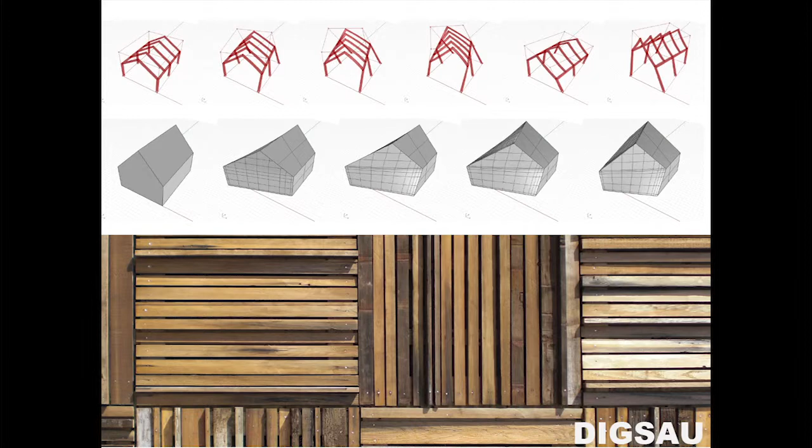But our studio aspires to develop spaces that, through somewhat conventional and traditional means of space, form, material, and light, create spaces that convey potent ideas and connect to the human spirit. Our inspirations come from all directions. Our projects employ selective use of high-tech production, manufacturing, and documentation technologies coupled with more traditional low-tech techniques that basically celebrate the patina of materials, the imperfections of human labor, and the virtues of chance.

We're a projects-based firm. We have a very wide view of what architecture is, how it's made, and who makes it. We're interested in projects that fit into that broad view of architecture, and we allow ourselves to be changed by the diversity of the projects that we take on. Tonight, we're going to introduce the office by presenting our projects as a collection of stories. Like the structure of Ovid's Metamorphoses, which jumps from one transformative tale to another, sometimes on point and sometimes more excursively down seemingly dead-end tangents. We hope that the works that we show tonight demonstrate a focus on elevating the human experience.

Authorships of the stories aren't singular, and many of the stories that we present tonight are not complete. But in 5.5 years, this represents a snapshot of how our office shapes architecture, and conversely how the projects that we do have shaped us as a firm. So Jamie's going to take over now and kind of talk about 3 of our first projects and how they shaped, at least initially, what we're becoming.

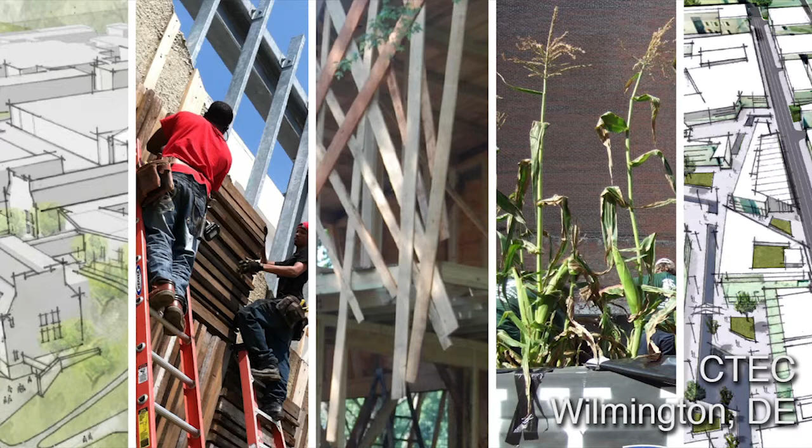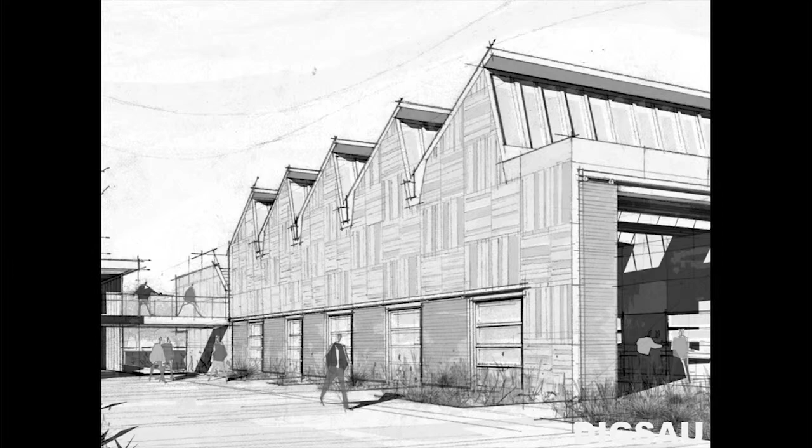And the first is what we call CTEC, the Challenge Program Construction Training and Education Center. And this was a project we did with a not-for-profit in Wilmington, Delaware, that works with at-risk youth, teaching them vocational skills. And it grew out of a wooden boat building school, and has now become a program that teaches all forms of construction skills while working with the kids to earn their GED.

And the site of the project is a site along the edge of the Christina River in Wilmington, Delaware, the former home of both a shipbuilding facility and a train building facility. And now, interestingly enough, the home of a replication of a 17th century Swedish tall ship that initially settled the only Swedish colony in the Americas. So certainly an interesting context for really any project.

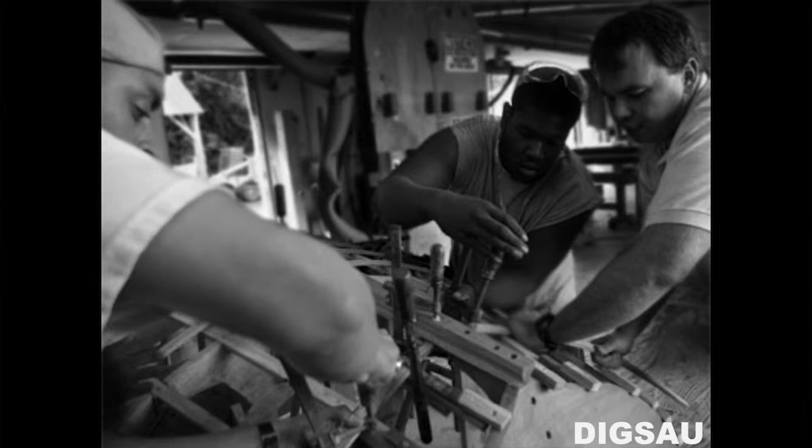What the Challenge Program didn't have was money. And what they did have was really an abundance of sort of marginally skilled trainee labor and salvage materials, and in particular a lot of timbers from warehouses in the Wilmington area that they had deconstructed over the years. And the design that we came up with was really conceived as a component of their educational program. And so the idea was that the trainees would build every component of the building that they could.

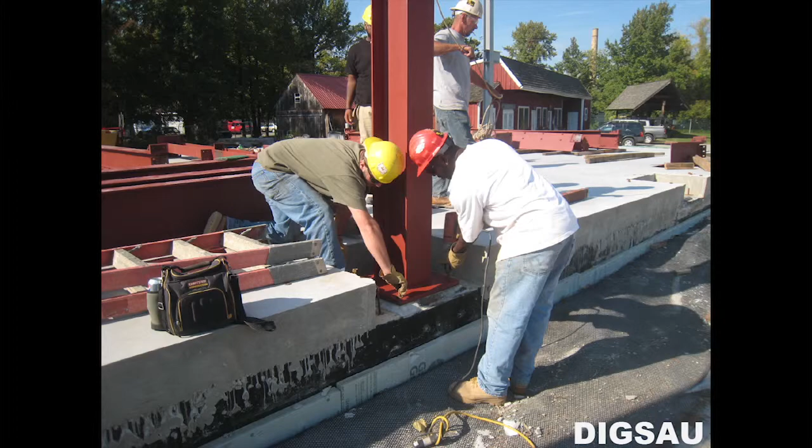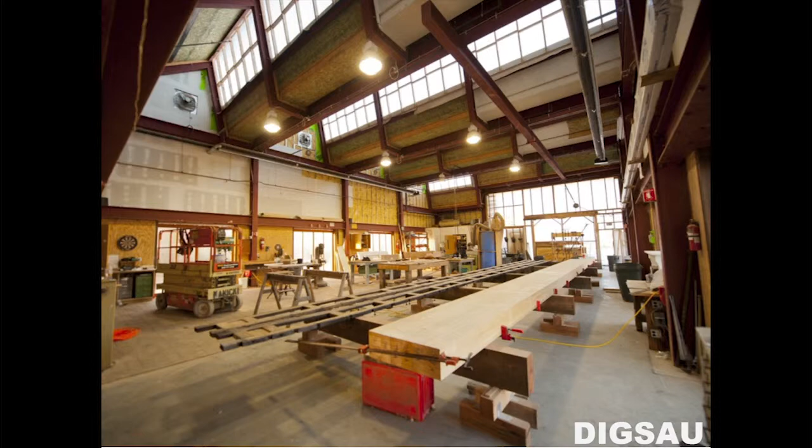And that really started through working with our engineers to design foundations that they could set and rebar that they could set. And the structural system was designed to use all bolted connections so that the trainees could work with the steel fabricators in erecting the structural system. The interiors used as much of the reclaimed material as we could employ, including end-block wood floors that were made from the timbers that they had salvaged. This is an image we like, but it's the shop floor in its slightly unfinished state. It's a little less irregular at this point.

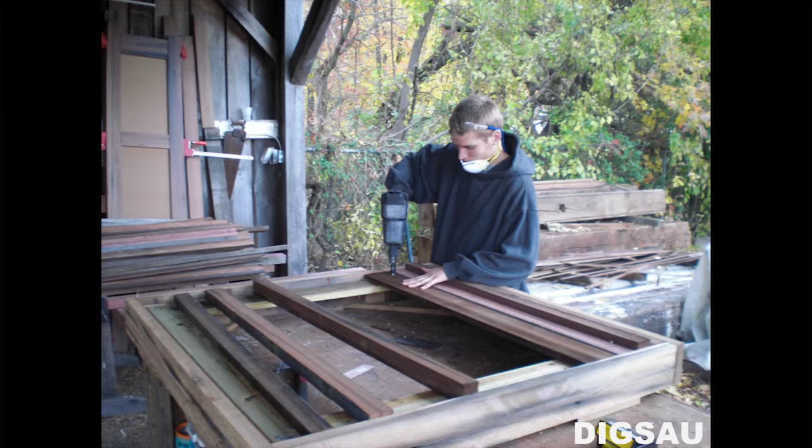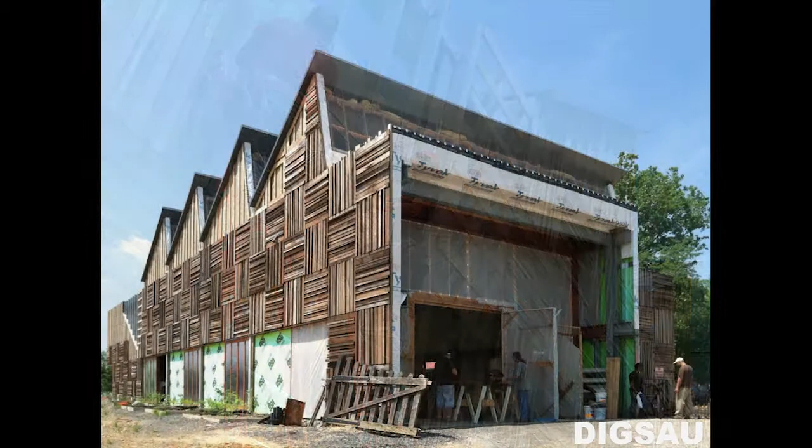And the exterior of the building employed these rain screen panels, a sort of repetitive system of 4x4 rain screen panels that used random widths and species and sizes of lumber that they had available in kind of a quilt-like way, a way that really sort of expressed the hands of each of the individual trainees and really, in a sense, was rich enough texturally to make up for a sort of vast discrepancy in the skill level that the program had as really inherent to its mission.

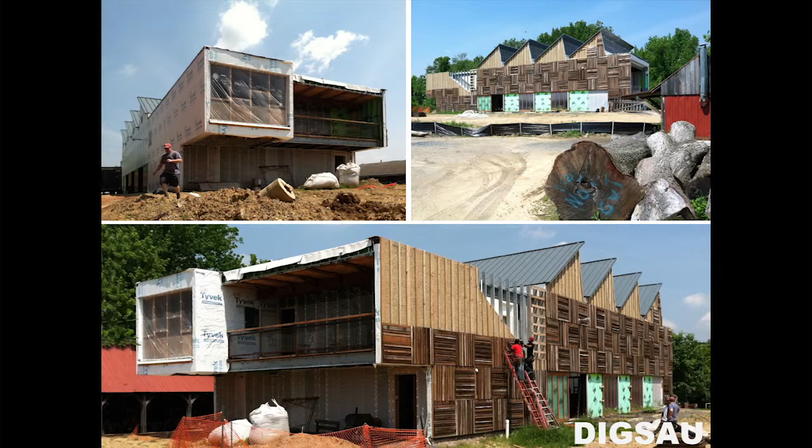And I guess one of the downsides about working on a project which is as much an educational program as it is anything is that the product is often a little less important than the process. And so while a number of projects have come and gone since we started working on this building, it remains an active project in the office and not much beyond what you're seeing here. It's sort of become for us a testament to the durability of Tyvek in many ways.

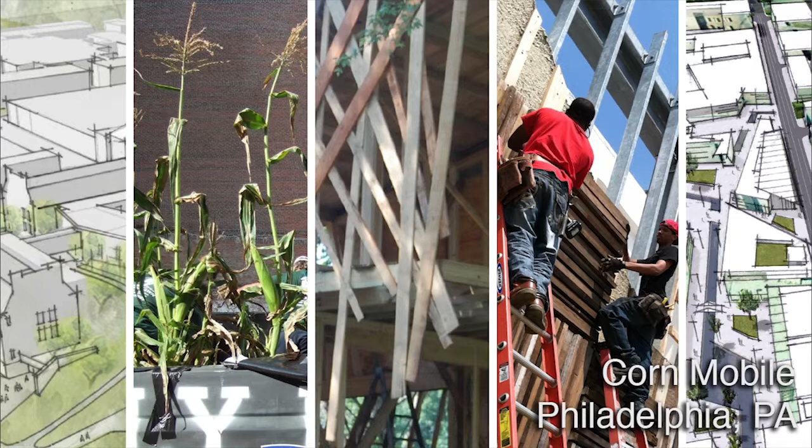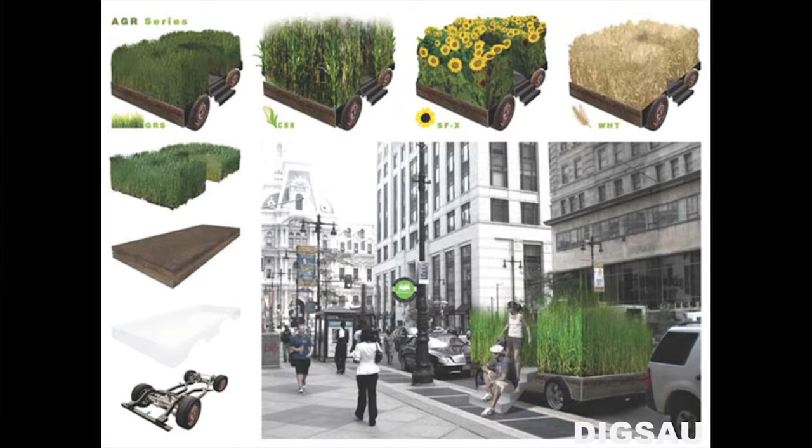Now the next project, also an early project, we called the Cornmobile. And the Cornmobile grew out of a competition we did really early on, which was for a parking space in Philadelphia, kind of like Parking Day, which occurs in many cities. In this case, we imagined a fleet of what we called agromobiles, and we imagined that these sort of mobile planters that were built on the chassis of old cars could be deployed all over the city and use parking lots and parking spaces in a way that elicited some interest in these choices we've made about roads and cars and agriculture.

And we ended up winning, or being one of the winners, and not having really thought it through, we failed to realize that we'd be asked to build an agromobile, and we were given $300 to do that, which is not a lot for building an agromobile. But this is where I think we learned a lesson that served us well, and that is that if you have an idea that is outlandish enough, and if you have enough enthusiasm, you can really get people to participate pretty easily. And so in this case, we got a sculptor, we got a woodworker, we got a really fine graphic arts firm, House Industries, we got a couple farmers, and we got our friends at the Challenge Program to help us build what would become the Cornmobile.

And it started with this 1971 Bronco that we got at the junkyard called the OJ Mobile. And we started working on it. We cut out the engine. We salvaged all the parts to try to get a little extra money for our budget. We cut the roof off. We painted it some more, filled it with earth and about 120 ears of corn, and the Cornmobile was born.

And the Cornmobile spent some time out on the streets of Philadelphia, here in front of Williams-Sonoma, which I'm sure they loved, before finally it did meet its demise, and we did pick most of the corn, and it was salvaged. And I think, again, here, for us, the important lesson was really the improvisational spirit of the project that kind of took it from a rather static concept to something that for us really became quite captivating and joyful.

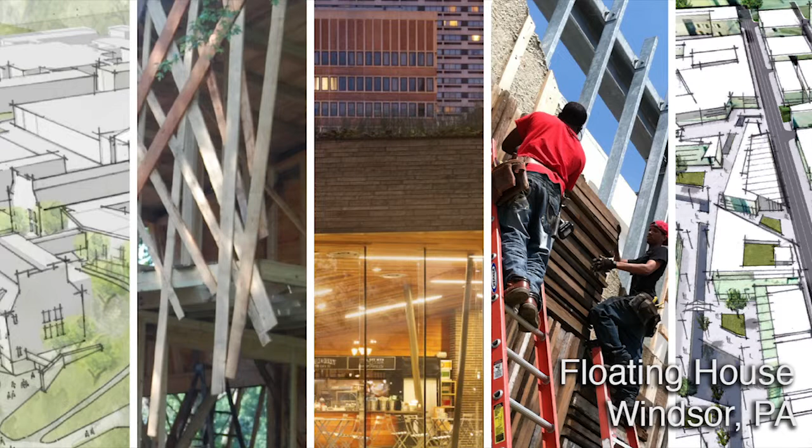And the last project that I'll talk about we call the floating house. So it's Cornmobile, and now it's the floating house. And in this case, the project was for a client who was a friend and a master builder and project manager that we'd worked with for a number of years.

And he had a property along the Susquehanna River in Pennsylvania where he built an earth ship. And for those that don't know, an earth ship is sort of a passively ventilated, passive solar building house made of tires, earth-filled tires sort of embedded into the ground. One of the things about building an earth ship along the banks of a river prone to flooding is that it flooded. It flooded fairly regularly.

And the beauty of our client was that his response to this was to go find a couple salvaged pontoons and a bunch of sort of one-by larch that he'd already salvaged, and asked us to design for him a floating house where he could stay when the earth ship was flooded. So we did some pretty casual research on hydrodynamics, and we started looking at the river's edge, and in particular at the kind of experience of being on the river's edge and looking through a lattice work of branches and of structures along the river's edge.

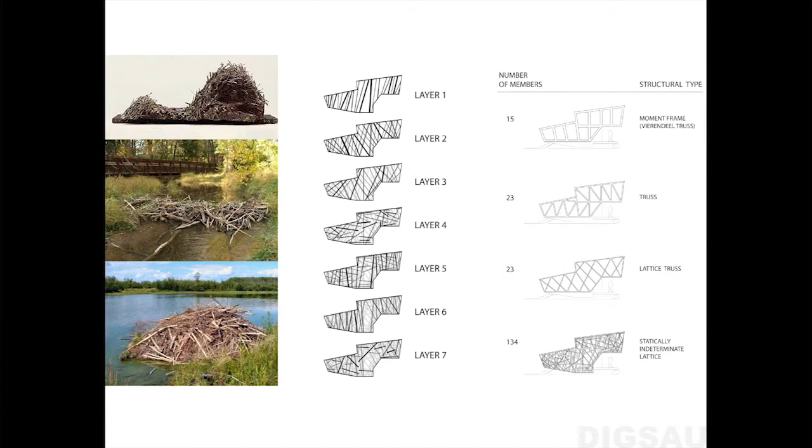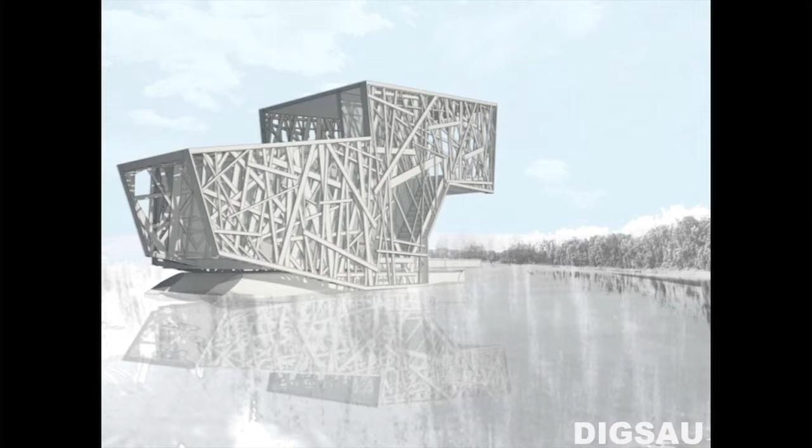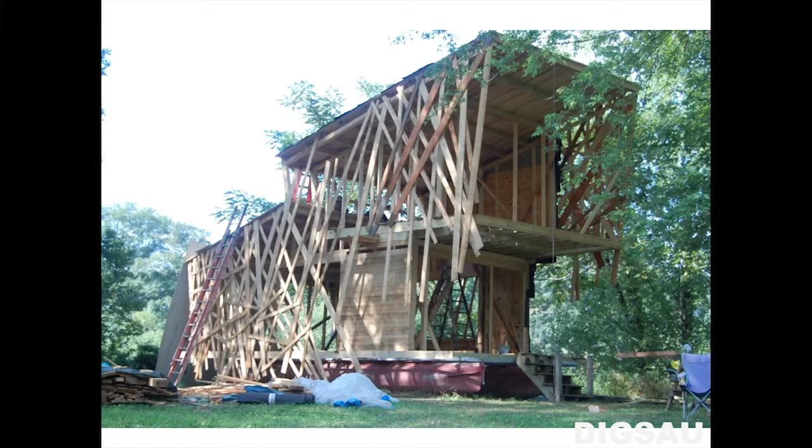So here's an early drawing of the design. Here's some renderings that we prepared to convince our client that it was a good idea, which really, in his case, wasn't hard to do. And then over the course of a weekend, probably a little more, they set out with their larch and constructed the floating house, which really never quite got finished and does remain an evolving project. But we think that's really in kind of true beaver spirit. So this is more or less where things stand. Now, I'll turn it over to Mark for more serious discourse.

So the next 4 projects are a little more conventional, and they all began and finished in the time that the Challenge Program has certainly been ongoing. So we'll look at a total of 4 projects here, 2 in Philadelphia and 2 in Delaware with varying urban conditions. And the first project is a project that we secured in downtown Philadelphia in a fantastic spot in Center City, Logan Square, which is located right in between City Hall and the Art Museum, and really a threshold type of space at the beginning of Fairmount Park in Philadelphia, which is one of the largest municipal parklands in the country, and if not the world, at 9,200 acres.

And this particular site also has incredible architectural and artistic features around it, including the Basilica of St. Peter and Paul, which has just been recently restored, and its brownstone exterior really sings at this point, and the monumental Swann Fountain, which is located at the center of the square, and really kind of a key feature in Center City, Philadelphia. So the site, when we arrived there, was quite derelict, despite its location in really a central part of the city, but hadn't really been taken care of or tended to over time,

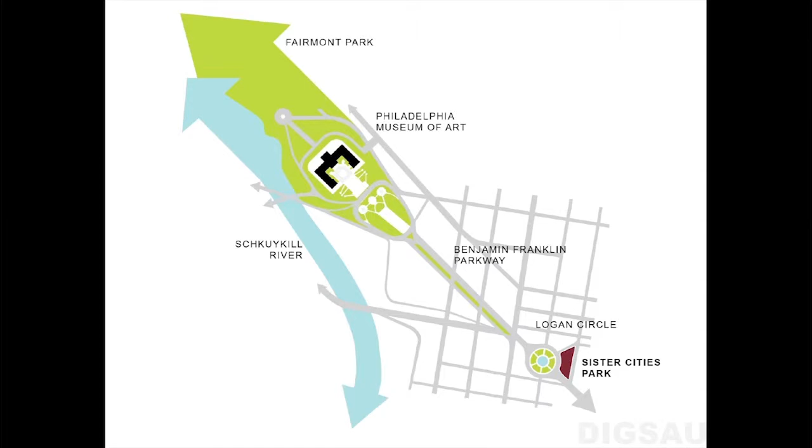and was a spot that after working with the design team, we began to transform in our mind from a public square to really the starting point of Fairmount Park, either a seed of Fairmount Park that had kind of landed down in the center of the city, or really the doorstep that allows you to transition out of the urban context and into the more natural settings of the park. And a part of that research we did looked at the park structures throughout Fairmount Park, and some of the natural structures and shelters in that space as well. And we used those as a point of inspiration and a place to draw from and abstract.

The project itself was really an intense collaboration with a very talented landscape firm in Philadelphia, Studio Bryan Hanes, who happens to be here tonight. And we really see this project as one of creative collaboration. So there's kind of shared ownership throughout.

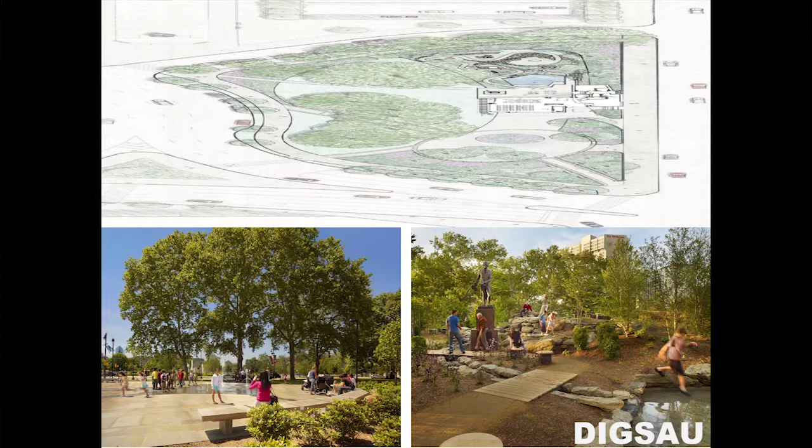But the project itself is situated on the east side of Logan Square, with the Basilica down in front. On the left there is the Sister Cities Fountain, which is dedicated to the 10 sister cities of Philadelphia, and you see the picture on the lower left there. And to the far right is a more naturalistic discovery garden for children to experience informal play in a more naturalistic setting. And in the middle of those two elements is the Park Pavilion.

And this is a visitor center and a cafe which, through the work of the Center City District and Bryan and the design team, began to look at this park as not just open parkland, which is sometimes very active and activated in the city, but a programmed space that has the Sister Cities Fountain, the Discovery Garden portion of it, and the cafe visitor center, which draws folks in.

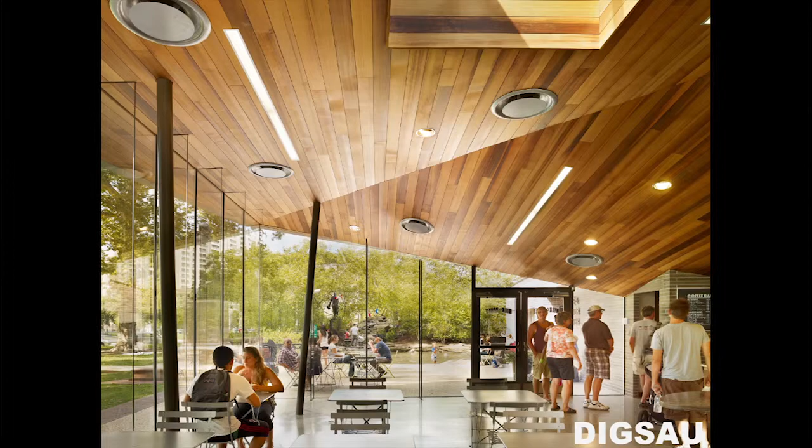The verticality of the city is part of the design thinking of the project. It was really a condensation of the entire Fairmount Park experience down into this small parkland, where you move from the verticality of the city through the space and in this short threshold of a building, taper down to a smaller scale, childlike, if you will, but one that is more scaled and protected.

The materials of the building, as a public project, were certainly a place that we had a lot of focus and really spent a lot of time looking at what the stone materials are, how the jointing would work, patternings, etc.

And I think for us as a firm, in the midst of working on the Cornmobile and the floating house, this was a project that presented itself as a real rare opportunity to have a project in the public realm in the city that we all live in and have children and inhabit on a daily basis. And so I think we took hold of this and invested ourselves, and the entire design team pushed it through with that in mind.

Currently, you drive onto the campus setting there, and you'll find a ghost shipyard with really incredible scale, buildings that are dwarfed by the size and scale of some of these ships. It also happens to be near the airport, so it has a regular passage of flight patterns over the site.

And the developer worked out a master plan with Robert Stern that took on some typical trappings of a campus master plan with a large boulevard that became the organizing feature. But when we entered onto the scene, the context really wasn't there. So where the client wanted an urban response, there wasn't an urban context really to work within.

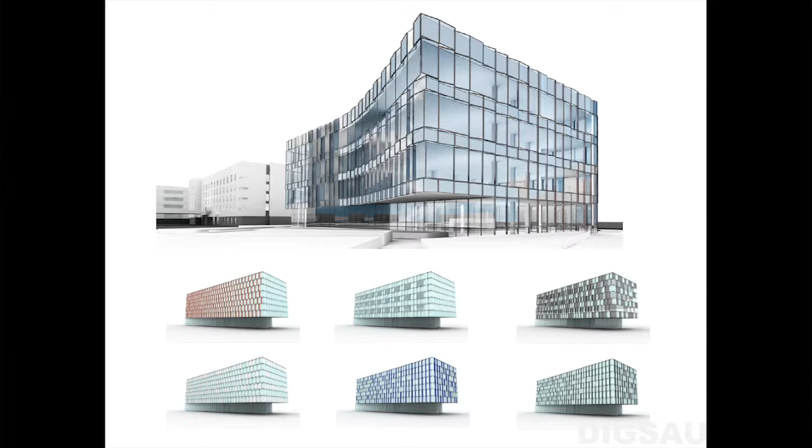Additionally, the project was a speculative office building. So this is back in 2010, and an adventurous client certainly to be thinking about a spec office building at that point. What it meant is that the client and the use of the building was really up in the air. So we were designing an open shell for future use, and the client liked to use terms like glowing lantern and a jewel box. So it became a study in glass and curtain wall, which quickly we determined was outside of the budget of the project.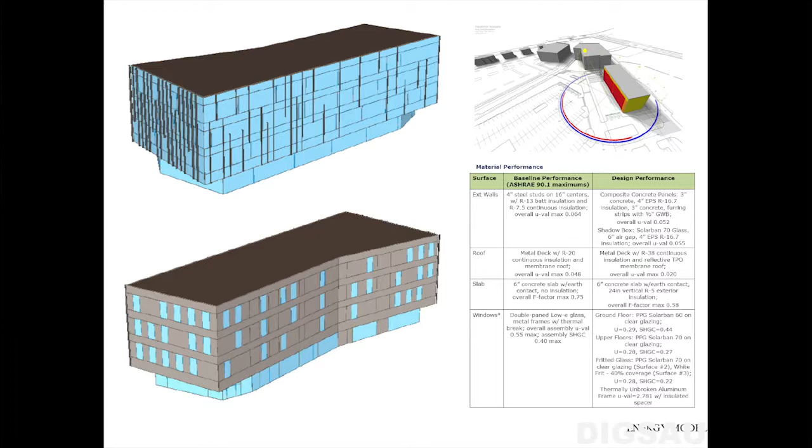So as the project unfolded, the core of the building migrated to the south side of the building and allowed what was really a more environmentally sound southern face of the building with abstracted window patterns, balanced on the northern side with glass curtain wall that responded to the open office floor plate.

I think one of the things that we really wanted to employ here was an abstraction of those forms, and not mimic the ship forms, but really just pick up on what was a lack of scale or a play of scale in those spaces. The interior of the spaces was balanced with that more textured, colder exterior with a lot of warmth and natural materials.

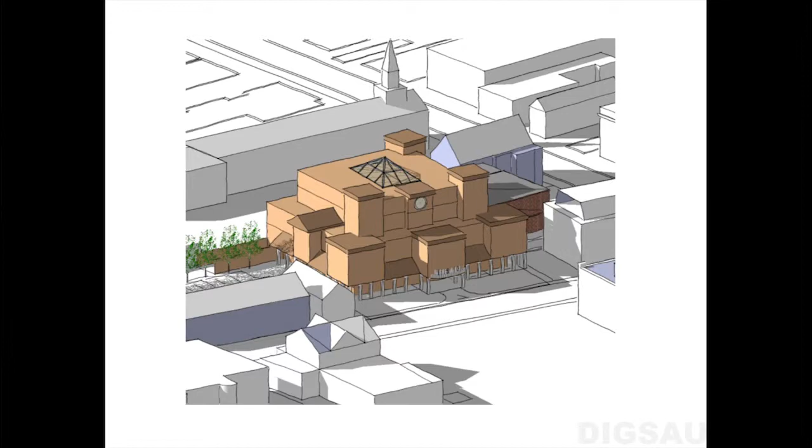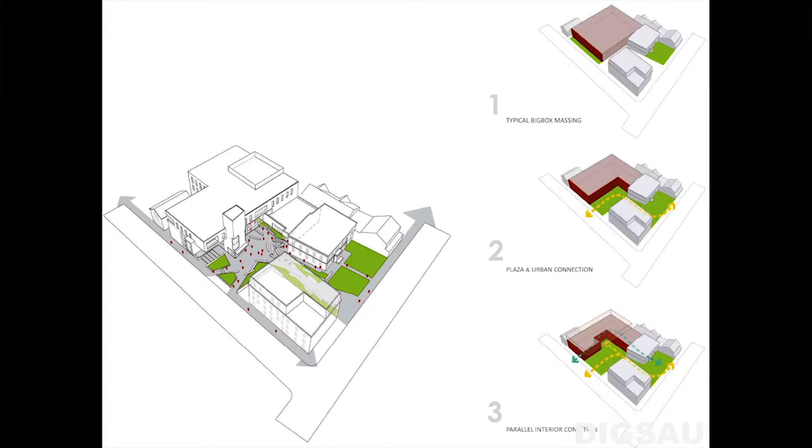And we were helped along in that process with some sketches provided in the RFP of where they thought the project might go. So we kind of absorbed this and realized that it wasn't necessarily a place that we wanted to take the project, and really challenged that framework through the RFP and by developing a site plan that carved away that big box and gave some of that space back to the urban surroundings.

The program included some university office space on the 3rd floor, which we differentiated and created a vertical tower to mark that entry. And the other thing that we really focused on was developing integration between the inside and the outside of the building, which is not typical of the big box kind of pull you out of your car into a space scenario.

Some of the other urban cues here was there were several historic brick buildings in the vicinity that we made an effort to highlight by utilizing a charcoal brick and a darker color of the building, and really allow the red brick of the existing buildings to act as the primary participants against this, what we presented as a textured abstraction of their campus monk bond. And then the inside had a similar type of arrangement with a wood wayfinding system that worked your way through the building.

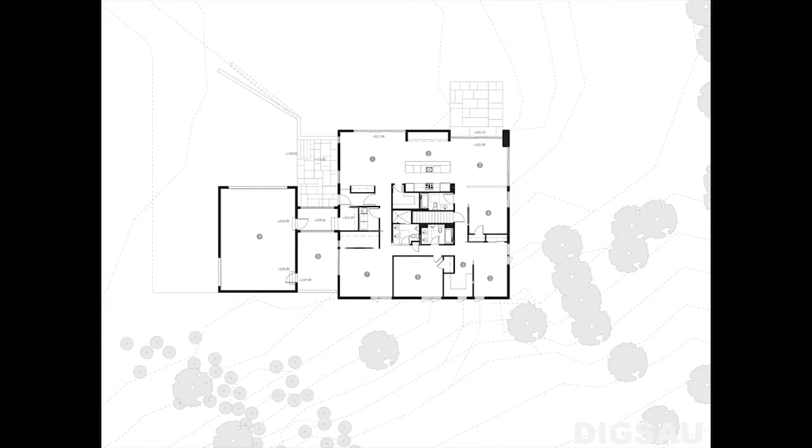The final project here pulls you out of each of those urban conditions into a more rural agricultural location located in southeast Delaware. This is kind of an adventurous client that lived in a suburban tract home and decided, after reading many issues of Dwell, that they wanted to move out of their current living conditions, and imagined kind of a loft-like space ranch house located in this rural area.

The caveat that they threw at us at the beginning was an incredibly low budget. And so right out of the gate, we tried to keep things simple. We found a good partner in a contractor down in Delaware who was really excited about pulling down a barn in the near vicinity and utilizing that siding for the building, which we liked, that texture and that kind of gravitas that it brought to really what is a fairly simple building with simple construction.

I think I'm going to hand it off to Jules here. Jeff's not just standing back there. He's going to get a chance to talk too.

The Chrysler Town is a project for University of Delaware that came our way while we were doing the bookstore project, and it was certainly at a scale that was unique to our firm. The university had recently purchased a 270-acre Chrysler automobile assembly plant that was obviously no longer in use, and they had plans to turn it into basically a technology town, complete with hotels and an Amtrak stop and a fairly self-sufficient, independent new town adjacent to campus.

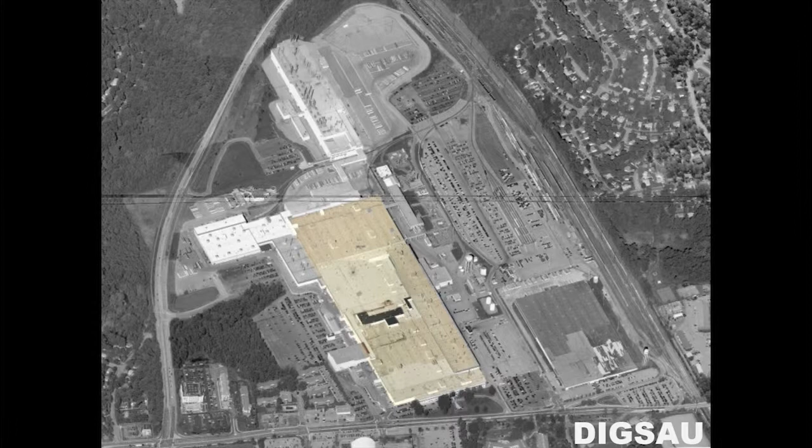In fact, so much steel that the university made more than $10 million from the demolition process alone because the steel was so valuable for recycling. But the liability that they were left with was a giant 30-inch deep slab on grade that would cost millions of dollars to demolish and to abate.

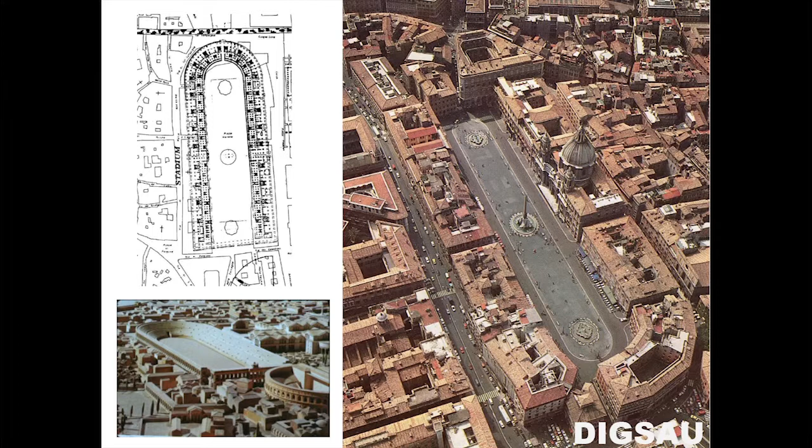And so one of the main ideas of our proposal used the Piazza Navona as a precedent and looks at how that space is shaped by the Stadium of Domitian from Imperial Rome that they just built on top of. And so the memory of Domitian's stadium is still with us in modern-day Piazza Navona. We took that idea and applied it to that 30-inch deep slab on grade and said, what if, instead of tearing it up, we use that not as a slab on grade, but as a massive spread footing that could then be used to accommodate any number of light to medium-sized modular structures.

So the kind of double Portland grid, which you see on the right-hand side, which is one type of urbanism, was flanked to its left with this giant slab on grade that was accommodating for much larger and unexpected structures. For instance, if Boeing needed 5 million square feet and that was how the deal was going to get done, you put them over there. And that big slab on grade could accommodate that kind of space, while a more traditional type of development might

emerge right next door. And so the thought was that, I'm just going to scroll through a couple of these, that the middle zone would really be remaster planned every couple of years, and the northernmost part at the top of the page just kind of followed a very simple and straightforward plan.

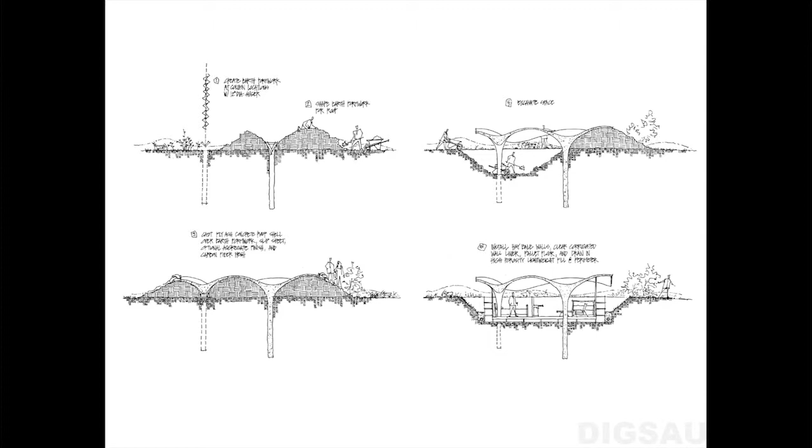So you occupy this lower horizon. So throughout the day, if you're in the house, you're more in touch with the ground, with your horizon being maybe a foot above ground level. And then the thought being that eventually these structures, after their useful life, give way and become hopefully wonderful ruins. Each one a little bit different, shaped by the initial forming of the soil, but adherent to the rules that were laid out.

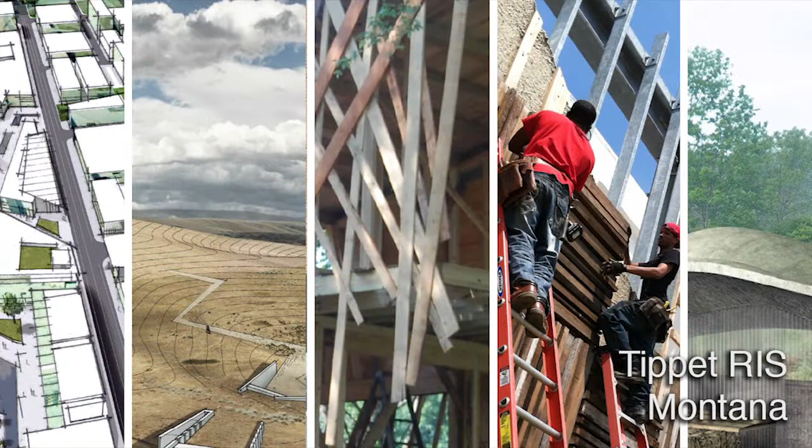The next is a competition that we did last summer, and again at a really monumental scale. This was for a performing arts village in Montana for a philanthropic couple that was very interested in the arts and wanted to build a very substantial performing arts village in Montana. The 4 firms that were invited to compete were Snøhetta, Saucier Perrotte, Bohlin Cywinski Jackson, and much to our surprise, DIGSAU. So we were happy to be in good company with all of the Arup consultants at our disposal.

Arup was running the competition and spent time with this client traveling the world in search of the perfect performing arts facilities. And as you can tell, it was really a spectacular landscape that we were working with, 14,000 acres of it. And kind of overwhelmed by the monumentality of this undertaking, we asked Michael Van Valkenburgh's office if they would team up with us, and they did, and that was a great experience for us.

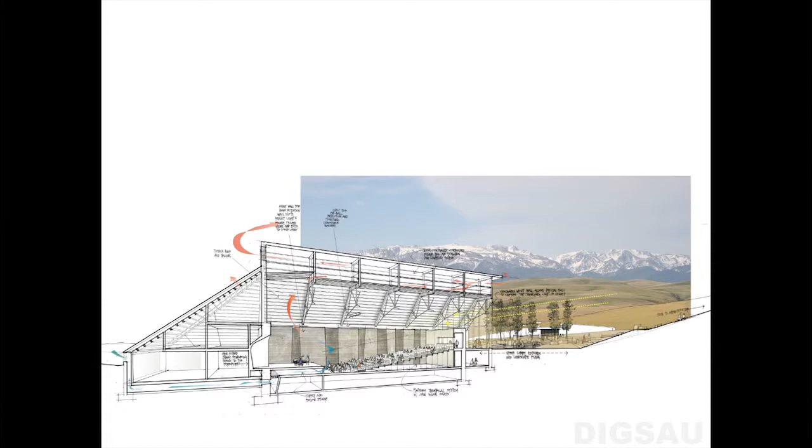The solutions ranged from small-scale performance follies in the landscape to rather sophisticated concert halls, several of which we really got into the inner workings of, all in about a month-and-a-half competition. There was a lot of ground to cover. There was an outdoor amphitheater, really a master plan for how to even begin to think about 14,000 acres of land, and additional programs such as libraries, galleries, extra artist housing, and such.

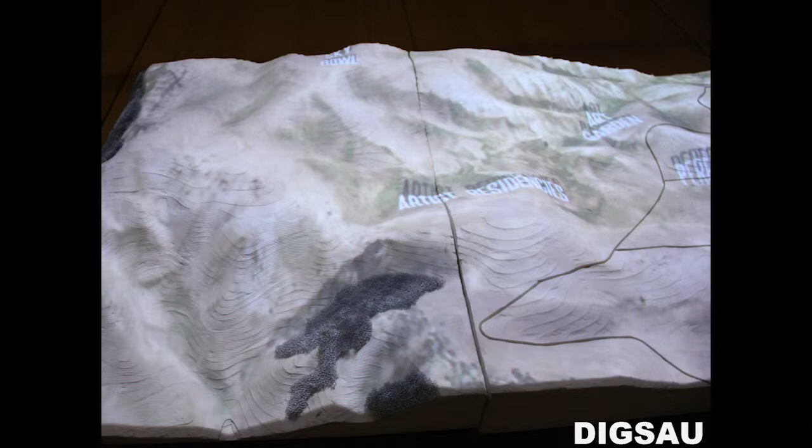In the end, they never picked a winner, so we had hoped that we'd at least be able to brag about losing to Snøhetta in a competition or something like that, but instead there were 4 losers, and so we've wondered what to do with this project, and in the process we made some really great models using a technique that Michael Van Valkenburgh's office uses, and we've, as of late, taken to projecting on these models, and currently there's a show up at Temple University where some of the models are up on the wall with animated projections and stills from the competition, so we got that out of it.

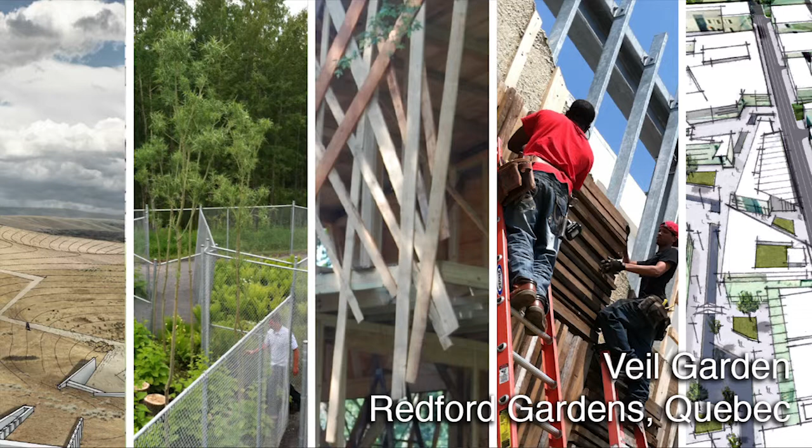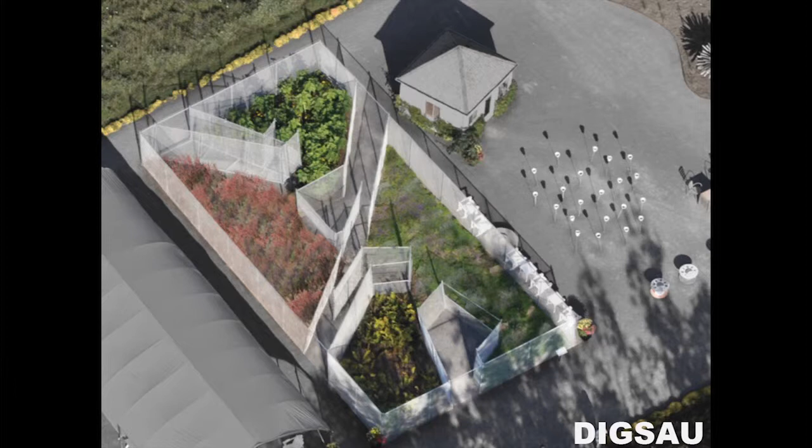And I'm going to speed up a little bit. The Veil Garden is a competition that we did with Studio Bryan Hanes back in 2010, and for those that don't know the International Garden Festival, it's really a spectacular event that showcases contemporary thinking in garden design. The Redford Gardens has a wonderful series of traditional gardens and then this fabulous festival grounds that every year adds a few new wonderful conceptual gardens.

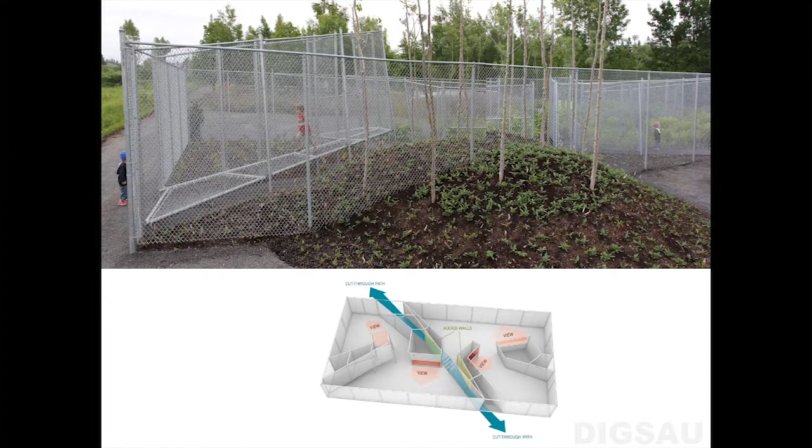Ours is a riff on the traditional paradise garden of ancient Mesopotamia, and it looks at a more decentralized version of that popular landscape precedent. The materiality is chain link fence and landscape material, and it's a very decentralized version of the original typology that never really allows you to see the whole garden at once, but you just see it quadrant by quadrant through these little apertures, and then the rest of the garden is veiled behind layers of chain link.

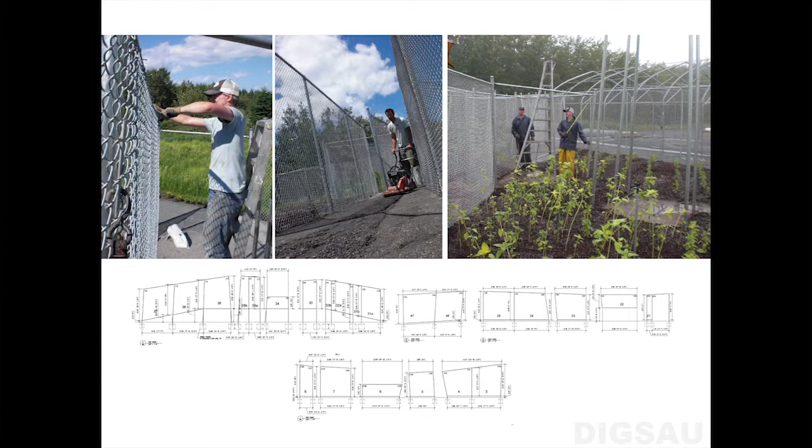And now entering its 4th year in the festival, the garden has evolved, and the human sensations of climbing and chasing and playing have added a new vitality to the project, and nature takes over in very interesting and joyful ways. We're actively involved in its construction each year. We return in the spring to make some modifications and get our fix of hanging chain link, which is really kind of a grueling experience.

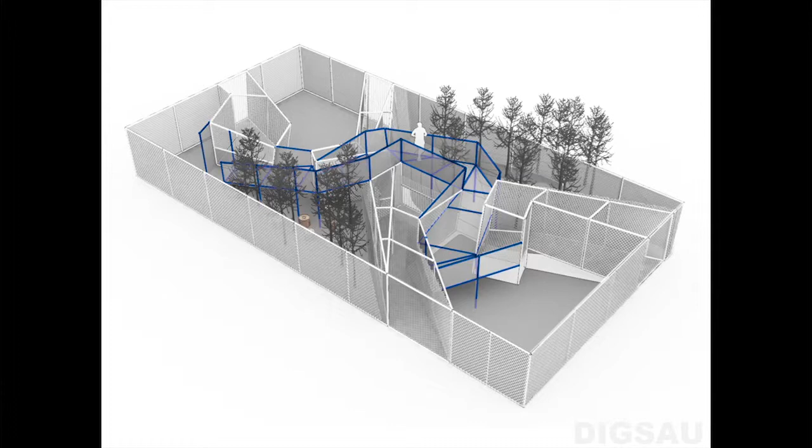But this year we are looking at a new up and over path built out of chain link, which takes us even further away from the initial Paradise Garden concept, and the meaning of this project has really evolved through its use and its modifications. We're also looking at maybe painting it pink or fuchsia, or this week we hope to do some roller paint tests on chain link to see if there's a way to brighten this thing up a bit.

So this is an interesting project in that it came to what may have been its completion in 2010, but has actually, fortunately, become an ongoing work for us. And Jeff is now going to talk about work that's on the boards and give a look into the future of where we're headed.

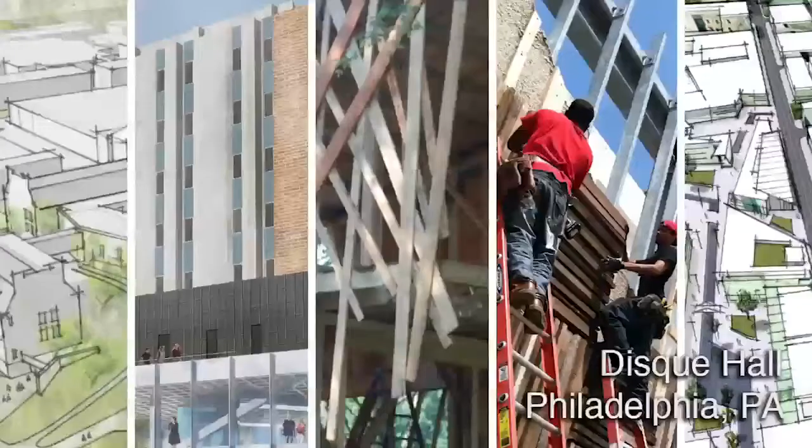All right, according to my clock here, we have 5 minutes, so I'm going to speed. Disque Hall is an interesting project at Drexel University. The interesting thing to us was that the site was that white airspace zone above an auditorium attached to a science tower. This is a view on the bottom, standing on that rooftop, looking out down on a new plaza space that's being conceived. So here's the new plaza space, which is being done by Andropogon.

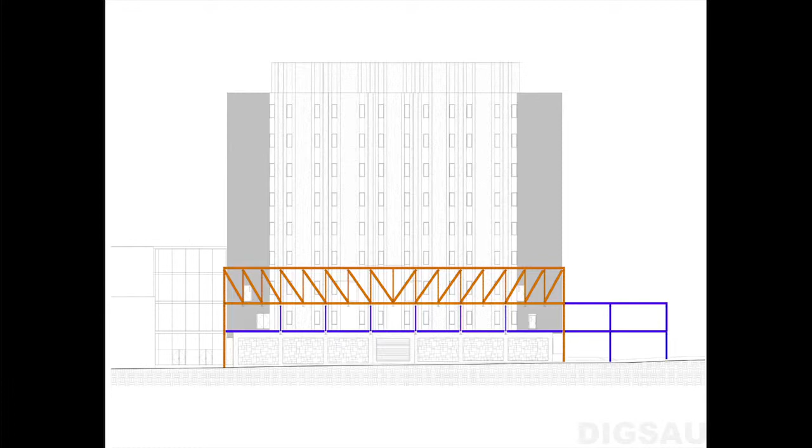The building that we're doing is this addition in the air above the existing auditorium against the tower. It's a tutoring terrace. The interesting thing about the structure is that we're not going to interfere at all with the auditorium. We're putting a truss and then hanging the floor. The truss supports an addition to the chemistry lab on the 3rd floor, and hanging from that truss is the tutoring space, which is the glassy volume, which really helps to form that space on the plaza.

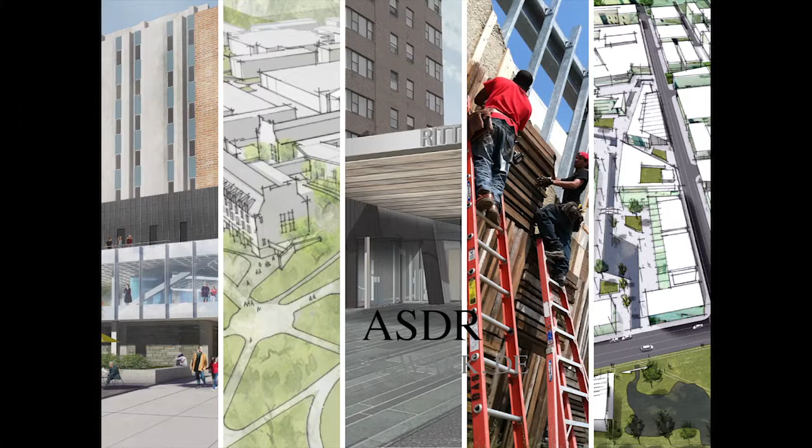All right, Academy Street, a dining and student residential project at the University of Delaware. They keep bringing us back for some reason. Here the problem was they wanted to really bring the student population back to the core of campus along the green. The way to do that was to build a new student residential facility as well as a new dining facility. The problem with that is that the buildings that everyone loves so much that form that green are small, Georgian buildings. So the challenge became, how do we bring a whole lot of building but not make it feel like a whole lot of building?

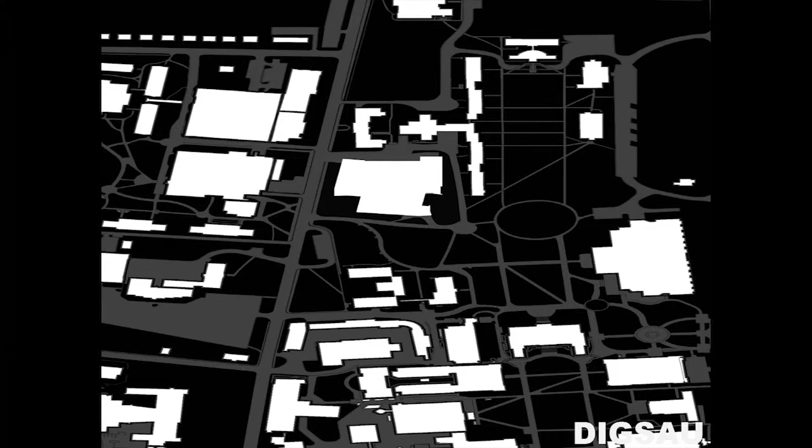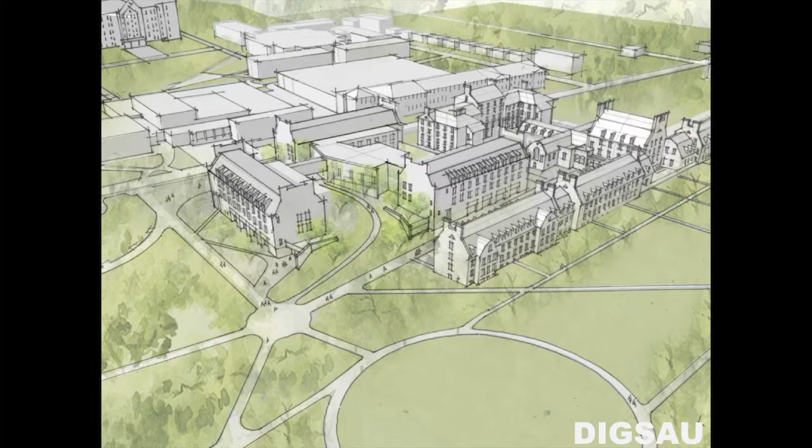It's really a large planted roof that even covers the loading dock, so that the building itself just gets integrated into the campus landscape, becomes a pathway through campus, continuing some of the connections that are being made by the green itself, and allowing us to bring the scale of the buildings down, and also introduce some topography to one of the flattest states in the country.

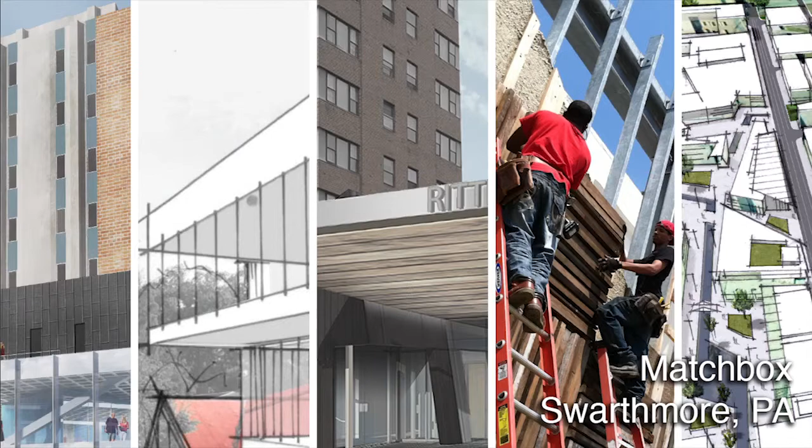The Matchbox is a project at Swarthmore College. It's in the zone of the athletic facilities, which is this amazing roofscape, these red roofscapes of buildings, and we've been asked to put a new building on one of the existing foundations. The new building is a 3-story building.

We were kind of inspired by the forest around it and looking at it as a 3-tiered building: a canopy, which is a more solid meeting space, a fitness space, which occupies the ground plane, and then underneath kind of a weight room, more heavy stuff. And it's really carving the landscape and connecting back to that strange roofscape that makes up the adjacent buildings.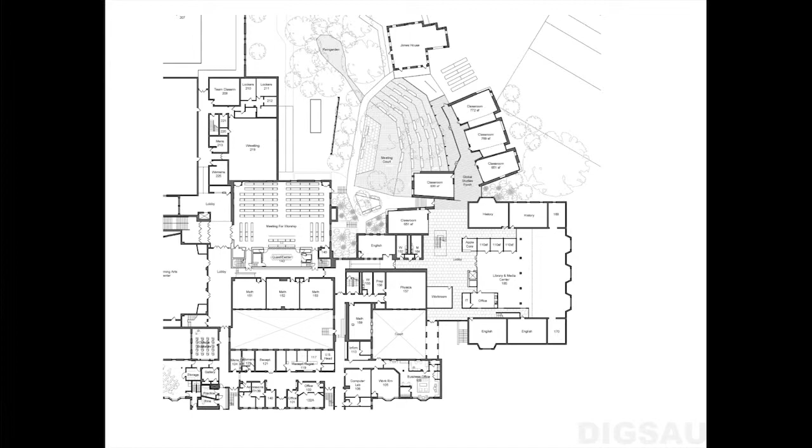They asked us to add 6 classrooms. And rather than add another addition, another building to already a series of 6 buildings that are interconnected, we thought of each classroom as its own little pavilion, making a connection to the historic structure on the campus, which is at the top of this drawing, and connecting this massive building out to the little farmhouse.

We're going to finish with Dogfish Head, whose story has in some ways paralleled ours. They hired us when we had no business getting hired. They didn't really know what architecture was, so their naivete brought us in the door. They asked us to initially just look at their space to do an office interior fit out. We quickly learned that they needed way more space than they had available in the building.

We were also somewhat shocked that Dogfish Head, known for being a beer company that does off-centered ales for off-centered people, was inhabiting this facility, which is completely symmetrical. It was initially a cannery, but had been completely reclad in a stucco and brick kind of extravaganza of symmetry. And the entry, in fact, wasn't even that center entrance. That was a false entry because they used the one in the back.

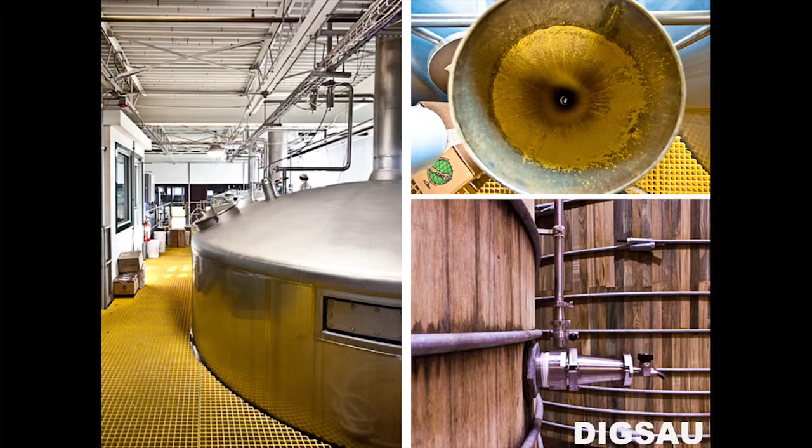We went and toured the facility and got really captivated by the different materials and the process that they go through to make beer. On one hand, their experimental nature, on the other hand, their scientific rigor in replicating the recipe once they've hit it.

The initial program of the building was simply additional office space because they were running out of office space, but we saw the problem as really making a place at this otherwise kind of desolate entry. We wanted to capture what had been a fire access lane and turn it into a place that tapped into the culture of the company and allowed for their big events such as bocce, which is something that people do there while they're waiting for the next tour, and really allowed this place to become a destination.

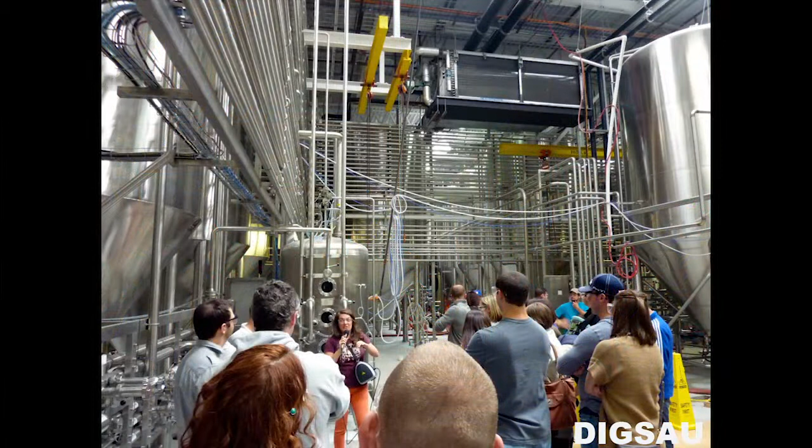The combination of people wanting to go there to see how the beer is made and the success of and demand for their beer led their founder, Sam, to call us in for a more strategic approach to how to develop their place. He also was and still is intrigued by these Disney cartoons about Paul Bunyan, which resonated with him as a Massachusetts kid. He wanted a forest. He wanted this place to be in a forest.

We worked with Julie Bargmann and D.I.R.T., sitting around the table talking about what they wanted, looking at the land they had available, and understanding what facilities they would need to continue to increase their beer production capacity, but also looked at it from the standpoint of bringing visitors to a special place, a destination that people literally have driven across the country to come see.

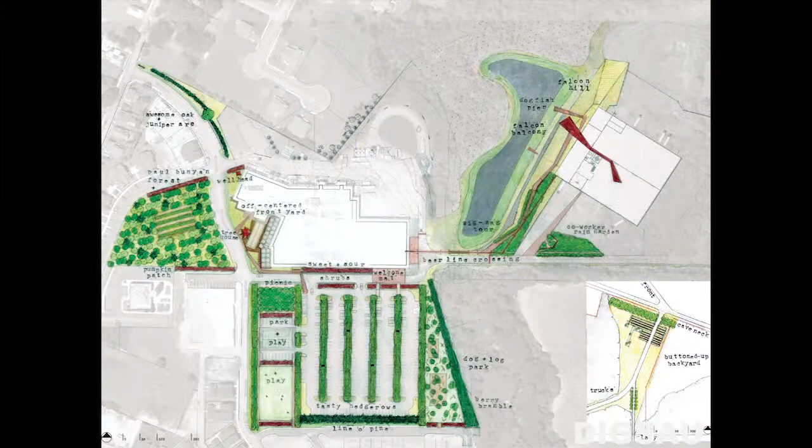The resulting model was turned into a campus master plan, which was a series of additions to the main plant, which included a front end where raw materials are brought in, and then at the back end, a new warehouse to both bottle and store the beer. And we wanted to really understand how visitors could come and experience that process, because it really is captivating.

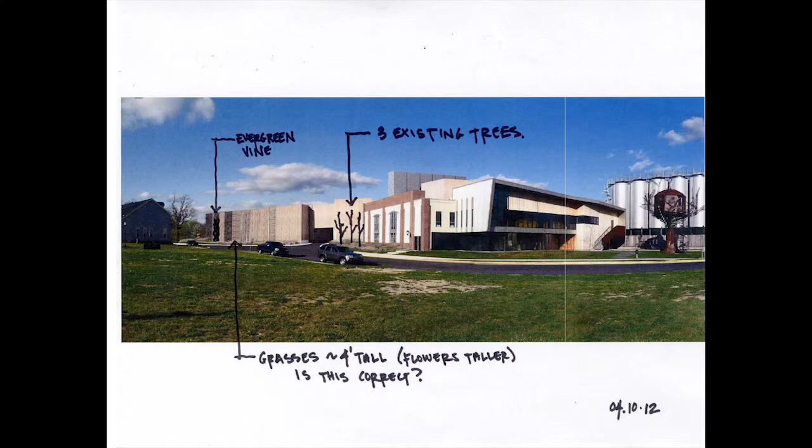So this is the entire facility. The red is the warehouse, which is this really amazing structure that we absolutely had nothing to do with because it's completely defined by setback lines and turning radii of trucks, but it's some of the coolest interior spaces we've ever done. Just the height of the required heights and the strange leftover spaces between them are amazing.

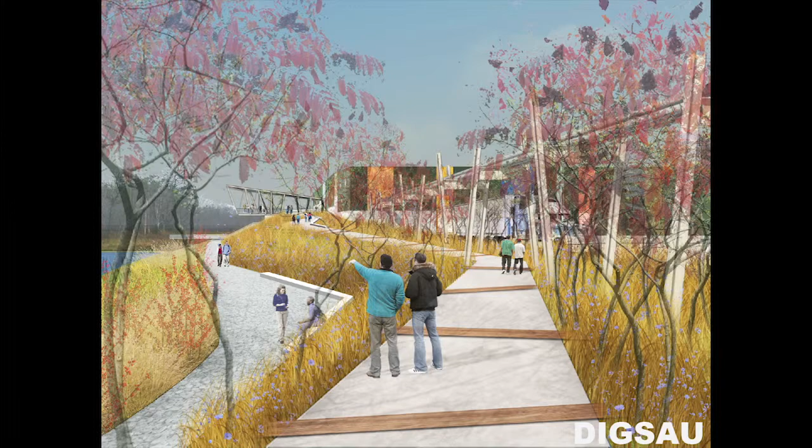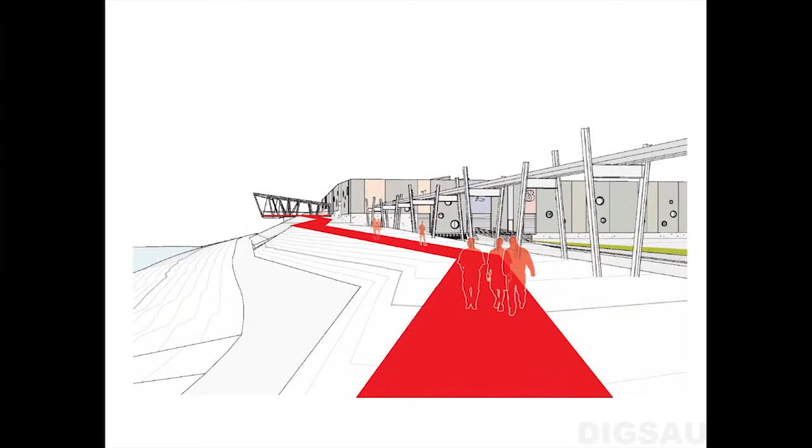The warehouse had a different problem. It's all the way at the other end of the site. We needed to get people there, so we really worked with the team at Dirt to develop a pathway that got you to the building, and then a way into the building itself, which is really a big bottling facility. So visitors can come up, find their way to this beacon, this balcony that comes out of the side of the warehouse, find their way in, and take a look at the production of the beer and where it's warehoused, and the trucks are coming to pick it up.

It's a really kind of fun and exciting place. It's one of the best parts of the tour. Up in safety, out of harm's way, in this suspended balcony. And perhaps the coolest thing is that the beer's made in the one building, but it's bottled in the other, so it has to make its way in a beer line, which parallels the path that visitors would take on their way to complete the tour.

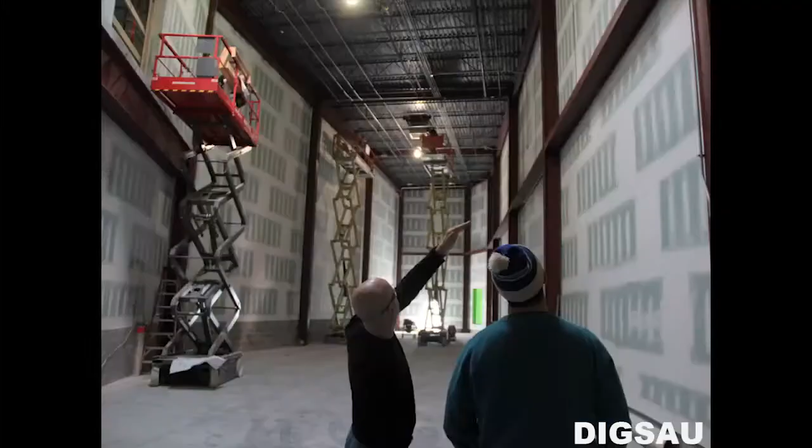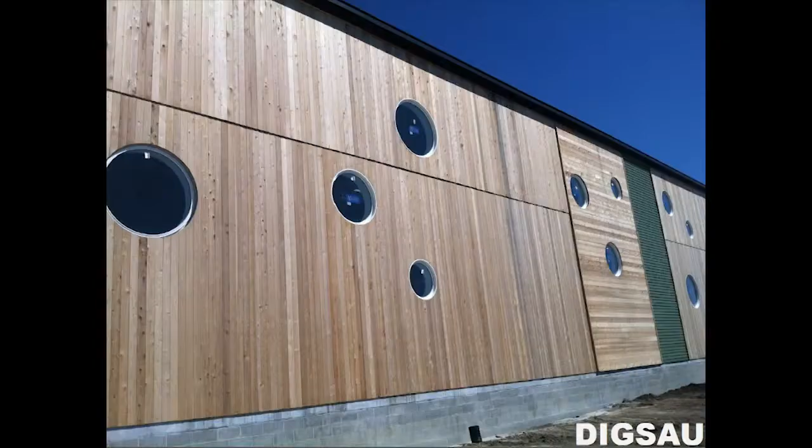This is the new brew house. These are some of these amazing spaces that came out of that. Again, we had really nothing to do with it. It was all driven by clear height requirements and zoning setbacks. This is the warehouse, and the approach to the warehouse. The cladding is a very simple rain screen system that uses cedar, which is similar to, not the actual wood that they use in their aging process, but one that does well outside. And we came up with a rain screen wall system that allowed us to modulate the direction of the wood to just try to break down the scale of this massive building.

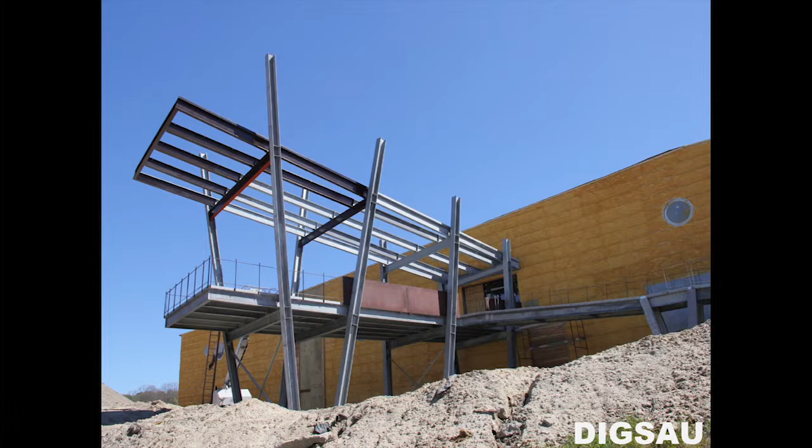Sam had a vision of circle windows. He gave us a sketch with circle windows. So the circle window has become kind of the trademark once it got into this building, and these circles are going to make their way back into the existing facility. The visitor's balcony is up above there, clad in the Corten steel, the same that was used to make the steampunk treehouse, which is that funky sculpture at the entry court. And then finally, this is the entry, or in this case, if we were exiting out of the warehouse and back out onto the balcony, which overlooks the lagoon that captures stormwater from the entire site and the surrounding neighborhood.

The next portion of the project in the future is this kind of entry point to the project off of the parking lot. And so we've learned a lot from Dogfish Head. It's a company that has grown quickly. We haven't grown as quickly as they have, but in some ways we've paralleled what they've done in terms of they continue to try to innovate and do new things. They have a fearless leader in Sam. I think our difference is that we have 4 of us, and as our colleagues in the crowd will tell you, we rarely agree with each other, but what we've found is that the strength of the dialogue that forms in those disagreements causes each of us to have to state a case and to make an argument, and it's really that dialogue between the 4 of us and with the rest of our colleagues in the office that really drives these projects.

This is the first time, probably in 5.5 years, that we've taken some time to step back and try to look at what we've done. We really tackle each project kind of ferociously and don't think about it too much. We don't really think about the big picture of what we're doing. So I don't know that we came up with any answers, and I don't know that we will. And I'm not even sure that we're trying to. I think what we have found is that we're inspired by projects, and we've tried to push even projects where it didn't seem like there was room to push, and somehow we're still here 6 years later.